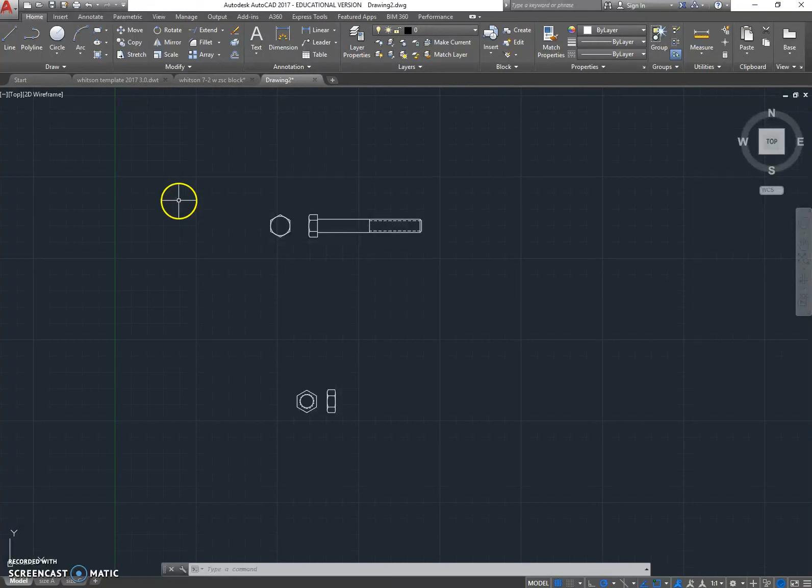Alright, I'm continuing drawing 10.3, the base assembly. I've brought in the bolt and the nut from the design center, and now I can continue to draw some additional parts used in this assembly. I think I'll start with some of the easier parts. The washer is pretty simple. It's basically just a couple concentric circles.

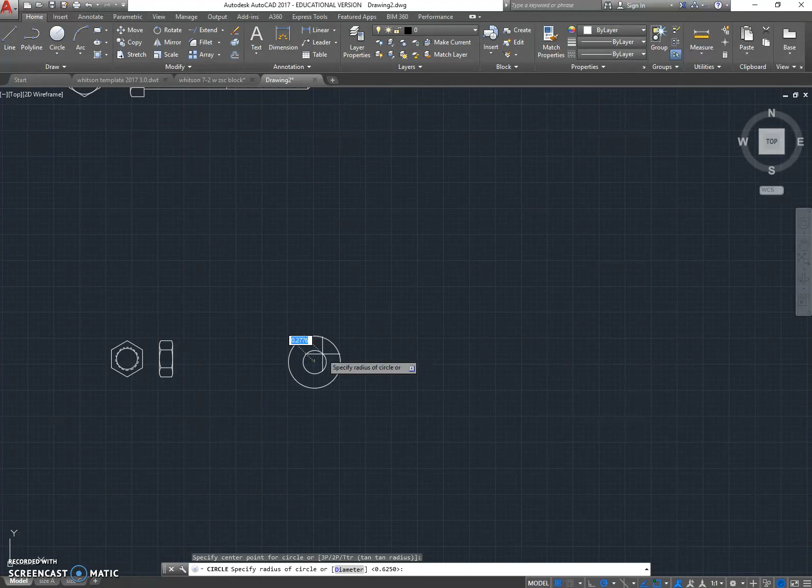So it has an outside diameter of 1.25 and an inside diameter of, it says 0.62, but I believe that should be 0.625. Oh, where did it go? I think I forgot to hit D for diameter, so let's try that again. D, 0.625.

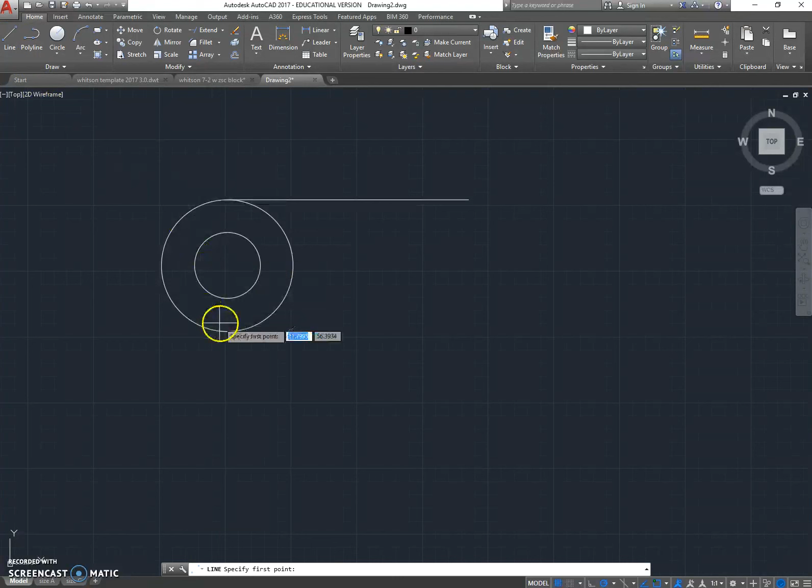Now the side view will be easy to make using the front view. Doesn't look like I've got my quadrant object snap turned on. Let's turn that on. I can snap to the top quadrant and draw a line straight over. Draw another one straight over. And I'll make a rectangle that is 0.125 inches wide by 0.625 tall.

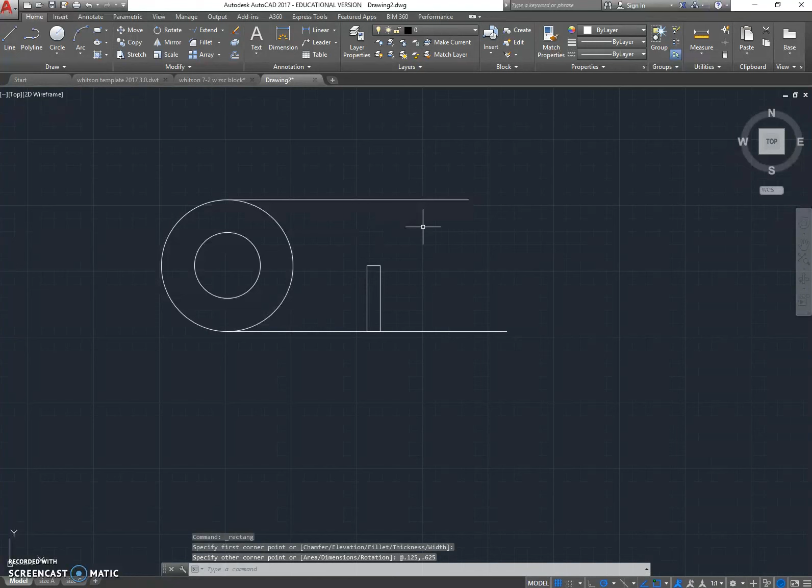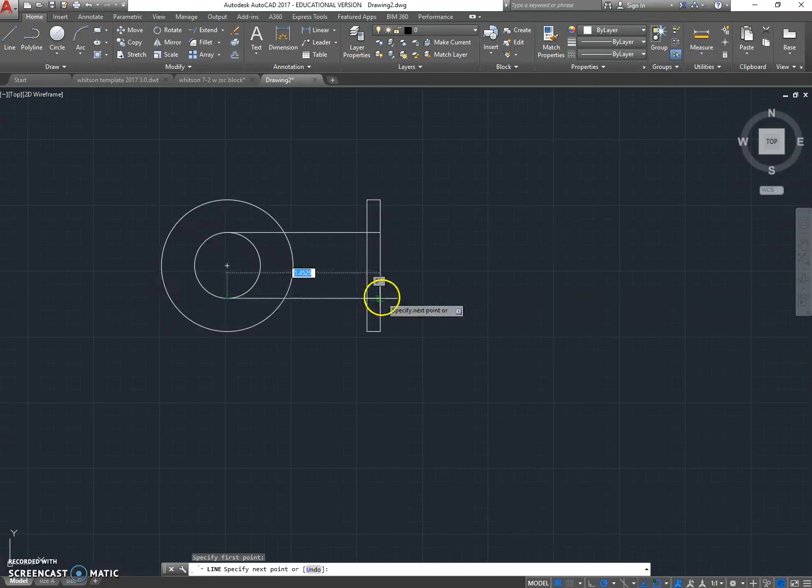Oh, not 0.625, 1.25. No matter. I'll just stretch that up. And now it's the correct size. Delete those construction lines. I can draw a line straight over from there, straight over here. So you see that aligning the two views in a multi-view drawing not only helps you read it, it helps you create it, it helps you draw it as well. So alignment is critical. Alright, there's my washer.

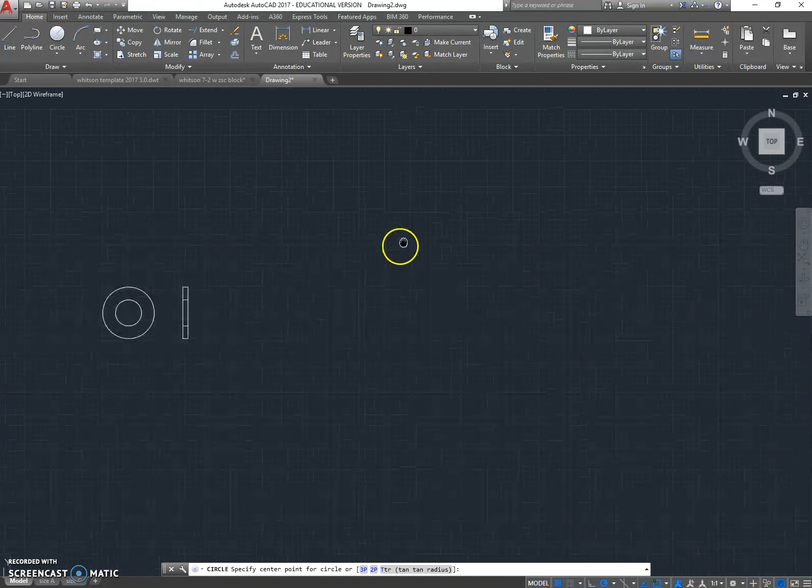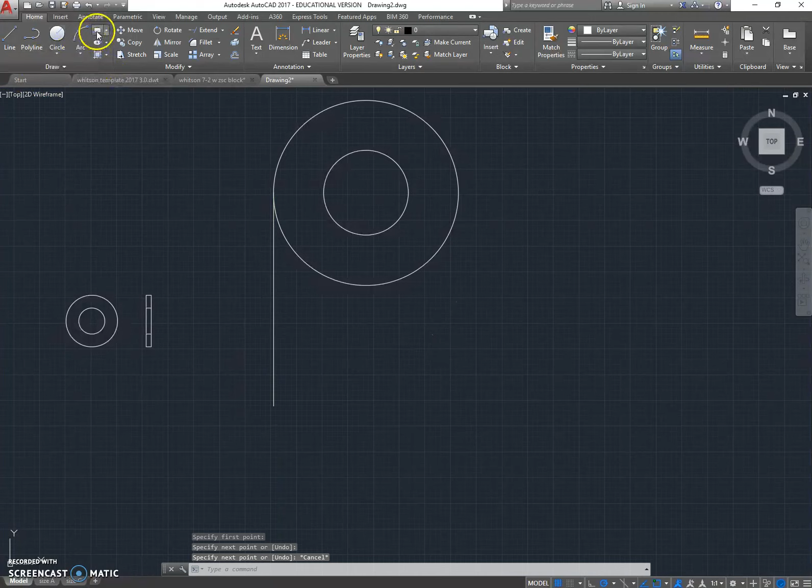Next I'll go on to the spacer. That's another fairly easy thing to draw. It's got an outside diameter of 4.5, an inside diameter of 2.06, and I'll draw a construction line down here to align it. I'll draw a rectangle that is 4.5 wide by 1.5 tall.

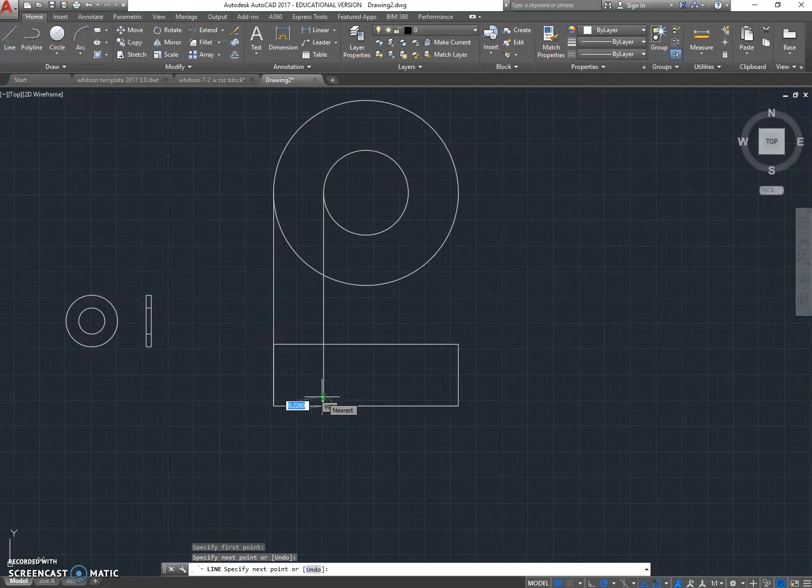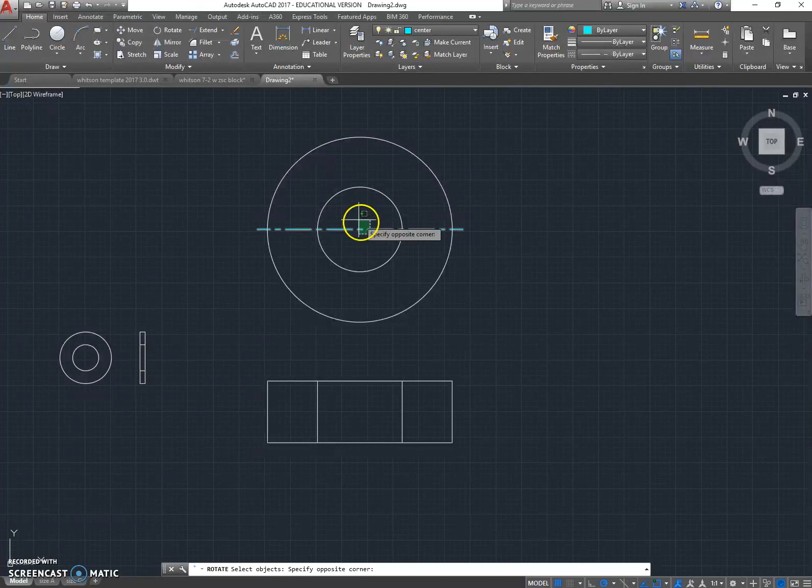Okay, now in the top view here, I need to place some center lines. Let's see, the overall diameter is 4.5. Let's make a line that is 5 units wide, 5 inches, and then move it into place like that. And then maybe I'll do a rotate, copy, 90 degrees, like that. Now I've got a bolt circle here. There's 4 holes drilled into this spacer. The bolt circle has a diameter of 3.5. D, enter, 3.5.

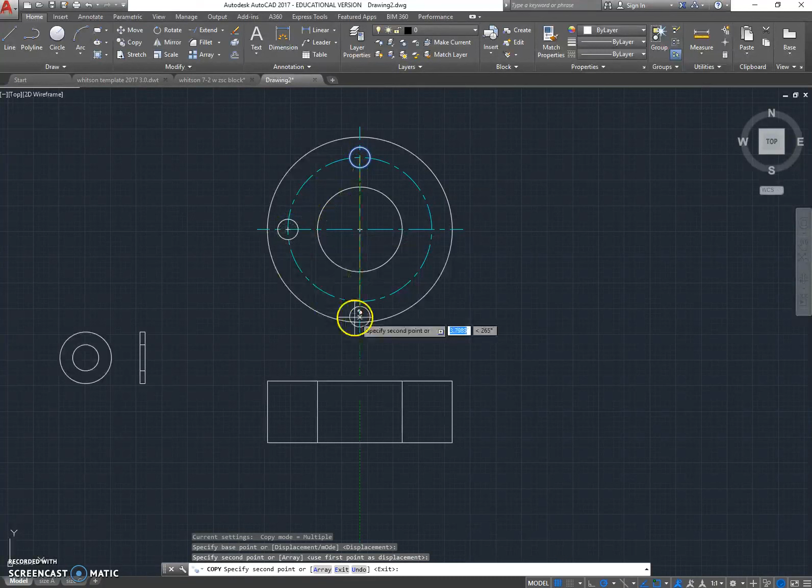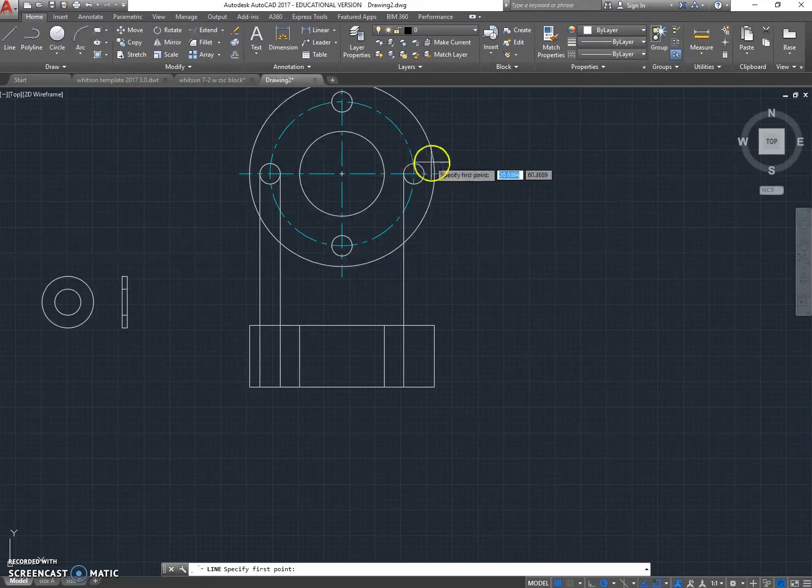The through holes have a diameter of 0.5. And I could do an array, but I think I'm just going to copy. With only 4 items, it's just as easy to do a copy as it would be for an array. And again, I'm going to use my top view to help make the section view, by snapping to these quadrants and just drawing a perfectly vertical line. Because my views are aligned, it makes it a lot easier. Okay, and I'm just stretching these lines down, like so. Let's add a hatch.

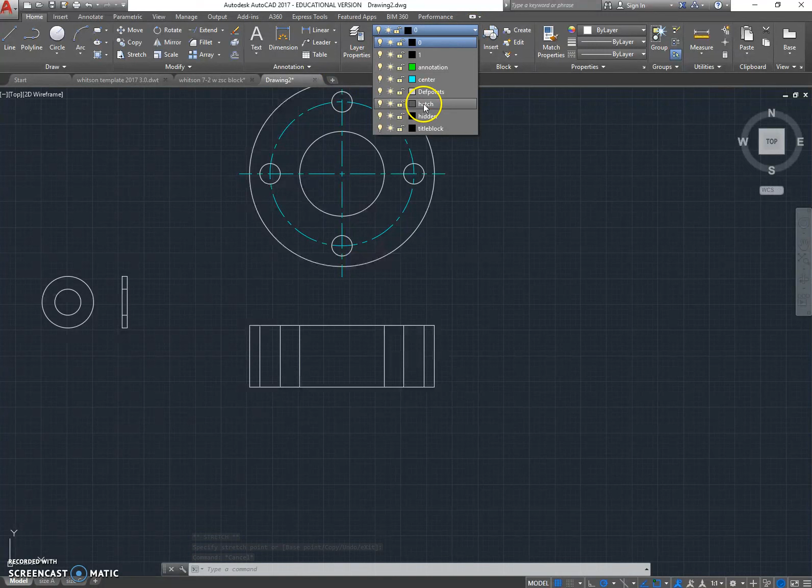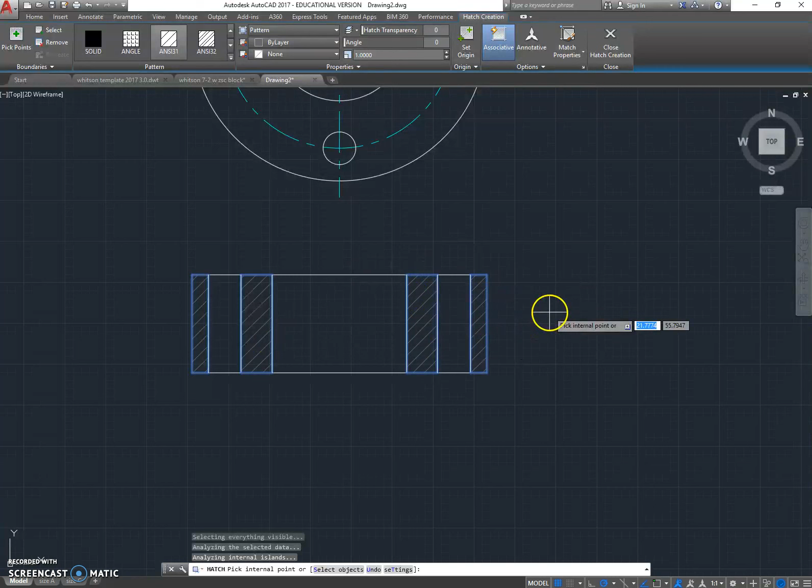Now, I like to put hatch on a separate layer. There's no rule about the size of your hatch. It doesn't necessarily have to be any one particular size, but it is a good idea just to kind of eyeball it and see, does that look about right? That looks a little small to me. The scale right now is 1, so I think I'll make that 2. There, the spacing of those hatch lines looks a little better, so I'll close that.

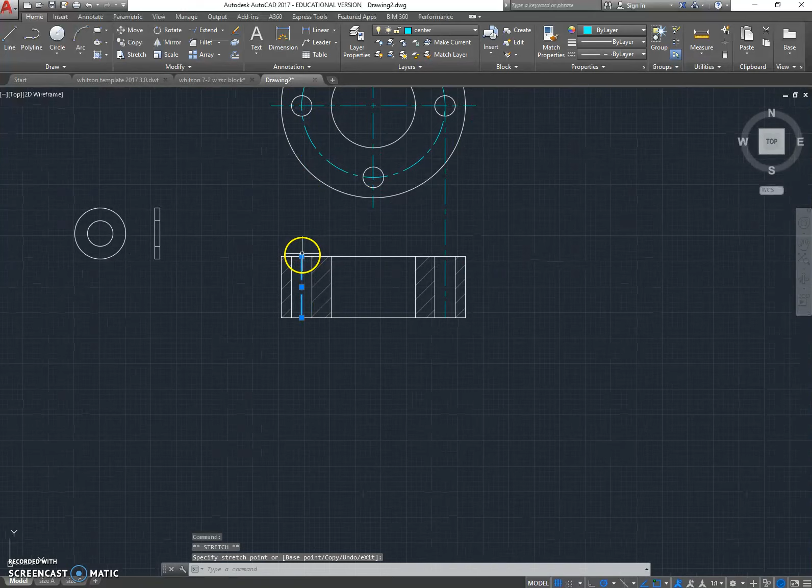And now I'll draw some center lines. So I'm still on my hatch layer, so let's get back to center. Draw a center line straight down here. Turn this back to center. Stretch this down to there. And this down to here. Now I don't really like center lines that end right on the visible object line. They should extend out beyond. So maybe I'll stretch it out 1/4 of an inch.

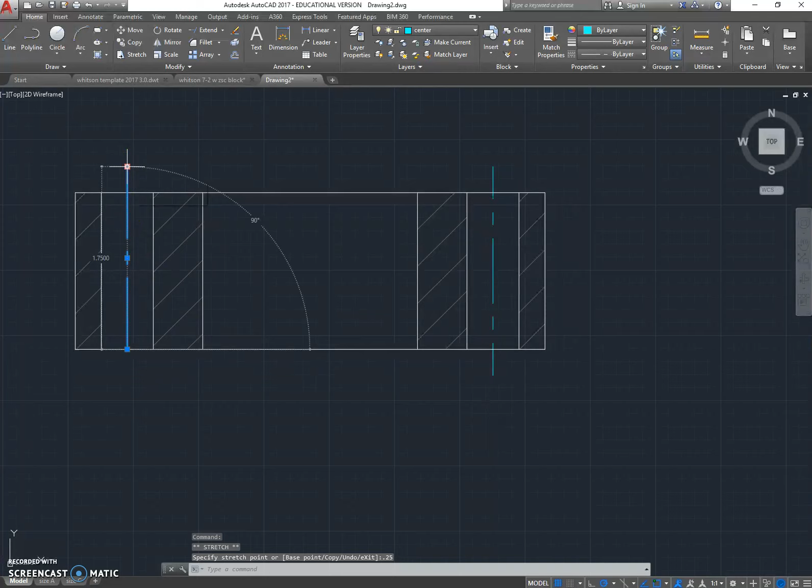And then, of course, we have the one going through the center of the spacer. And that's good. I think I'll end this video here and resume with the next one.